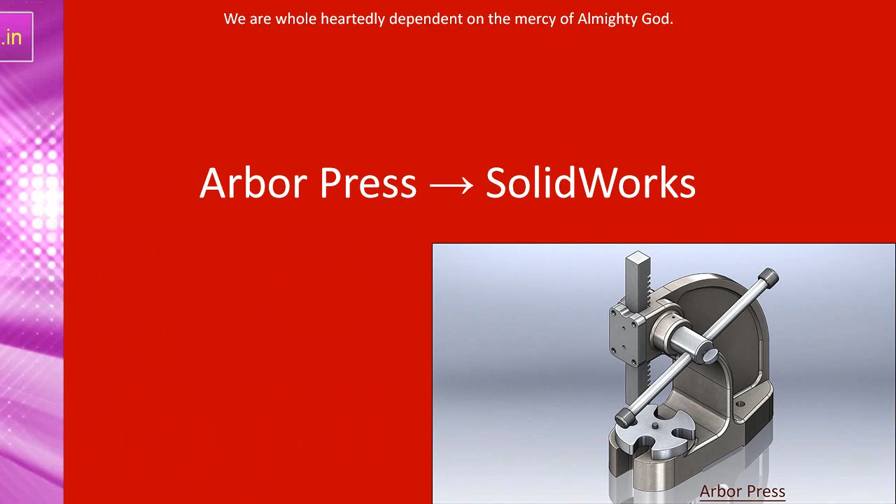Today we will create an assembly file of Arbor Press in SolidWorks. In this video, you will learn the full modeling process of this model and its components. We have used 10 part files and one assembly to make this assembly.

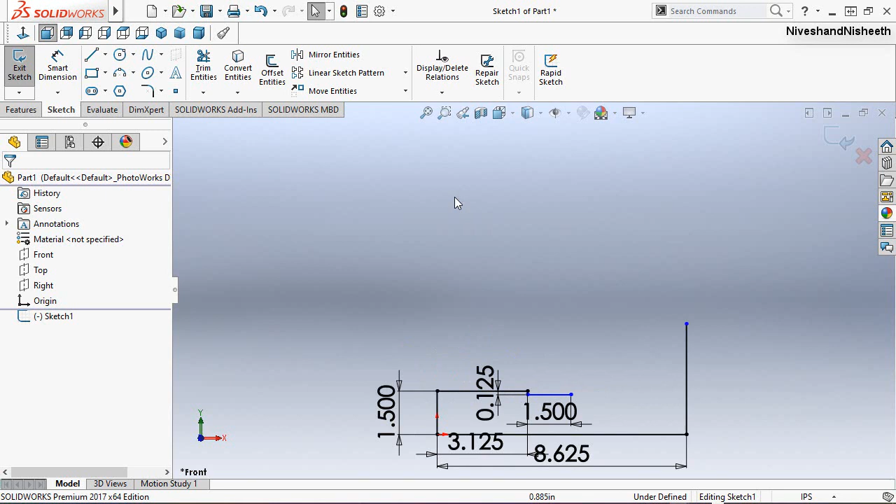Now draw a vertical line from this point. Create another line here; its length will keep 2.5 inches. Now we will draw an arc between the end points of the line like this.

Now we draw two more lines here like this, and create another arc. Now select this arc and this line and fix the tangent relation between them. Now select this one and apply another tangent relation on it. In the same manner, we will do more tangent relation over the inside of the arc.

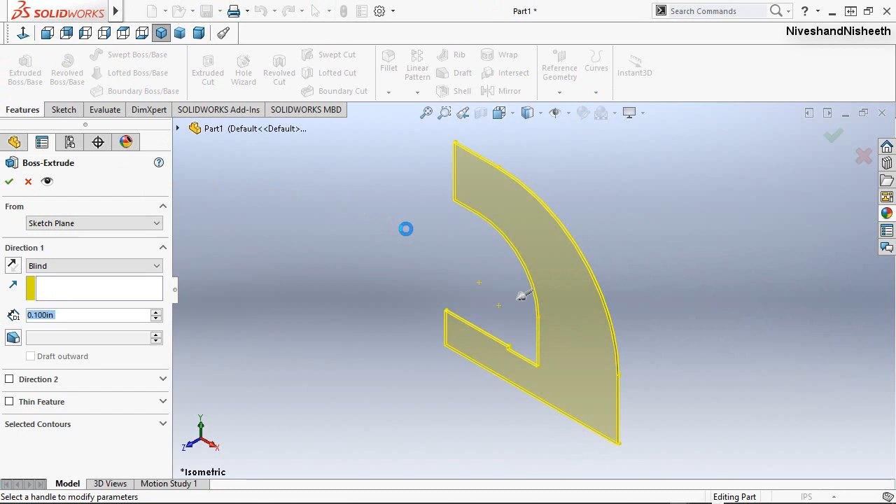Activate the extruded boss base command from here, and fix the depth value 3.5 inches, and click OK. Now see, my first extruded boss base feature has been created in the design window.

Now we will change the material of the part as polished steel. We will add one more light in this part like this. Now my model is looking perfect.

Save the part file with the name Arber Frame in the Arbor Press Assembly folder. Click Save.

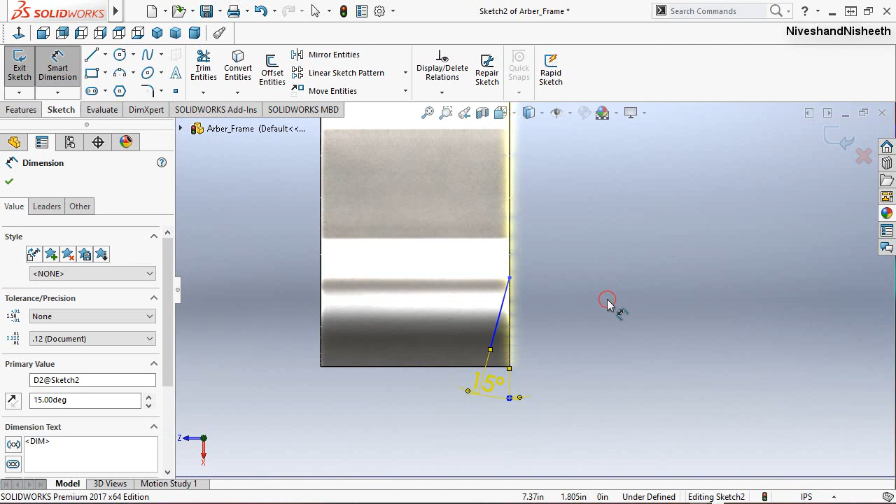Fix the angular dimension 15 degrees between this line and the outer edge. Now we draw an arc from the end point of this slanted line, and apply the tangent relation between them.

We will create a center construction line over the mid of the base extrude feature. Apply the radius of this arc, 1.25 inches.

Now select this point and the center point of the line and apply the coincident relation between them. Now we draw a vertical line between the end point of the arc and this slanted line to connect it, and apply the collinear relation between this line and the outer edge.

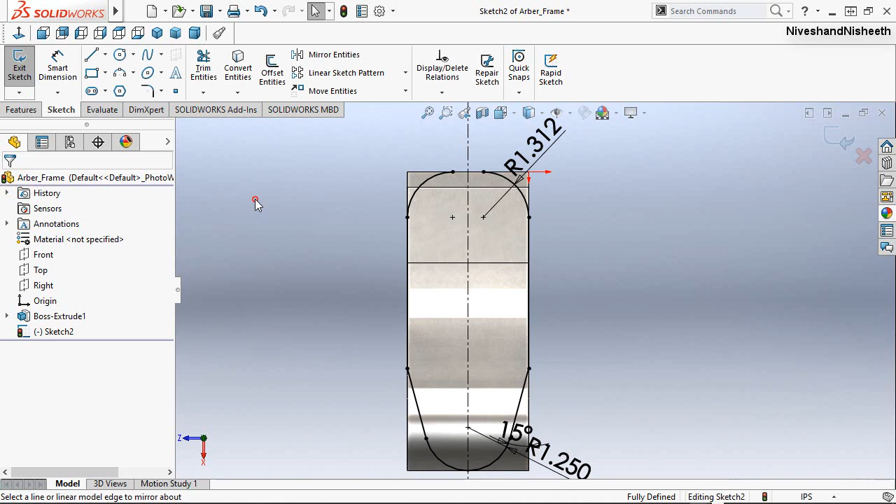Now we will activate the mirror entities command from here and select the entire sketches. We will choose the mirror about option, select the center line, and click OK to finish the command. Now draw one more line between both the endpoints of the arc to close the sketch, and finish the sketch.

Now we will activate the extruded boss base command from here. Choose the reverse direction button, and select the through all option. Now we will deactivate the merge result button so that two separate solid bodies are made here, and click OK. Now see the result.

Now we will go on the Insert tab and activate the intersect command. In the selection area, we will select the base extruded feature and then select the second extrude feature. Click on the intersect button. Now we will select each region one by one which we want to remove the portion.

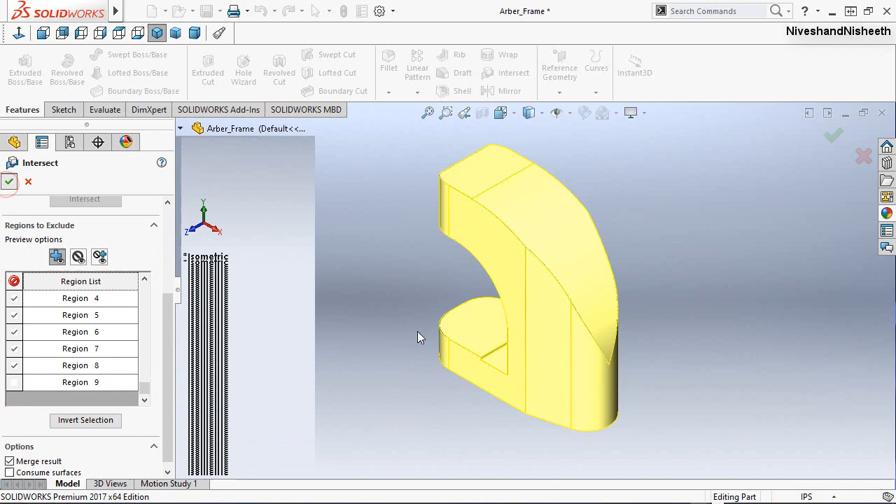Click OK to finish the command. Now see the intersect feature has been created successfully. My part is looking perfect. Alright, save the file.

Let's start a new sketch over the front face of the model. Click normal. Create a vertical line here, its length will keep 2.365 inches. Fix the dimension 2.434 inches between this edge and this line.

Now we draw two more lines on the bottom side and apply the dimension 0.375 inches between these two lines. Now create an arc on the end points of the lines to connect it, and apply the tangent relation over this arc and this line. Fix the radius of this arc, it will keep 3.375 inches.

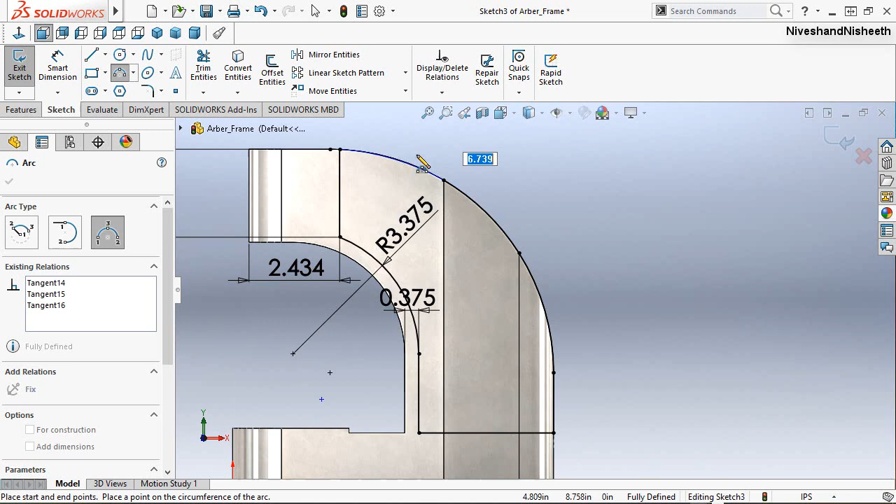Now we will take the project of the side edges of the frame by activating the convert entities command. Convert the projected sketch into construction geometry. We draw the line and arcs over the projected sketch. Alright, finish the sketch.

Rotate the model in this position and activate the extruded cut command. Fix the cut depth value 1.469 inches and click OK. Now see, my slot is cut here.

Let's start a new sketch over this slot face. Now we draw a vertical line over this edge, its length will keep 1.984 inches. Activate the offset tool from here, fix the offset distance value 0.375 inches, select the outer edge of the model. Choose the reverse direction button and click OK.

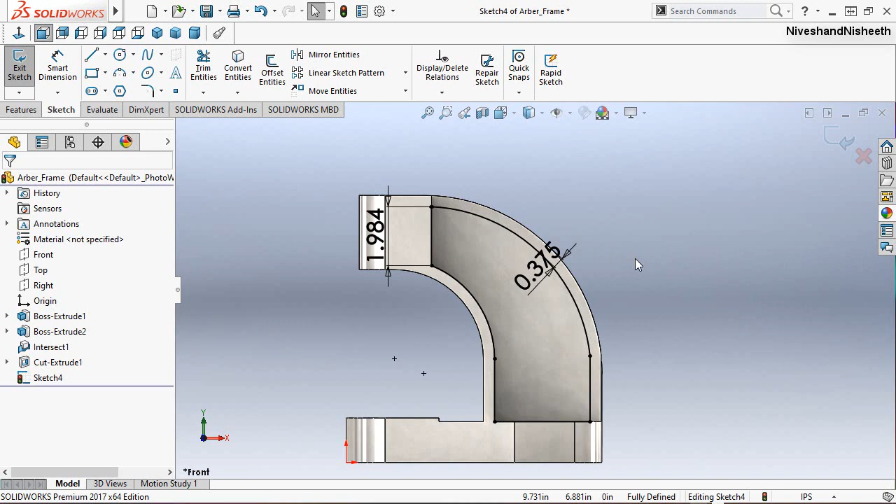Take the project of the inside edge. OK. Draw another line here to close the sketch profile. OK, finish the sketch. Now we will cut this sketch profile 0.125 inches. Alright.

Create a new sketch over this face. Draw a circle here and its diameter will keep 1.75 inches. Now select the center point of the circle and midpoint of this vertical edge, and make horizontal. Now we will draw some more lines here, something like this.

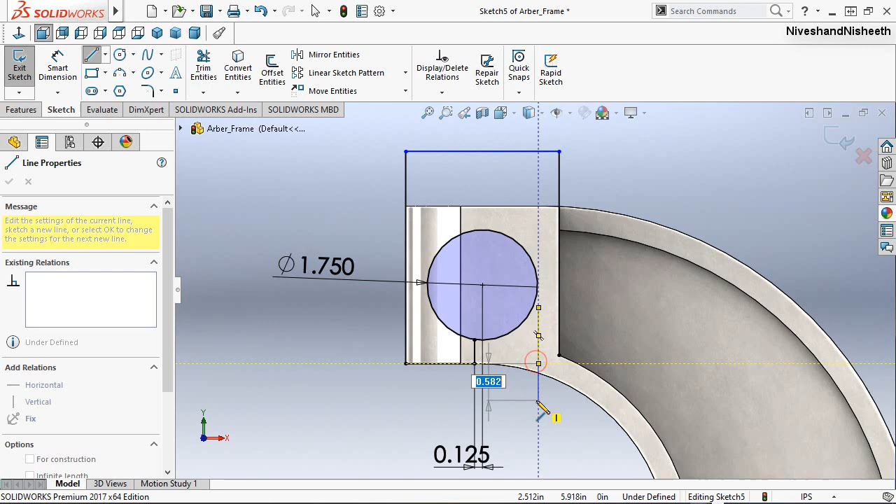Apply the dimension 0.125 inches between these two points. Now select these two points and make vertical. Draw a vertical line here and fix the dimension 0.375 inches between these two lines.

We will extend this line to this circle and trim the arc from here. Create an arc here and apply the tangent relation between these two arcs. Now select the two arcs and make equal. Okay, finish the sketch.

Set the cut depth value 0.875 inches. Click OK. Now see.

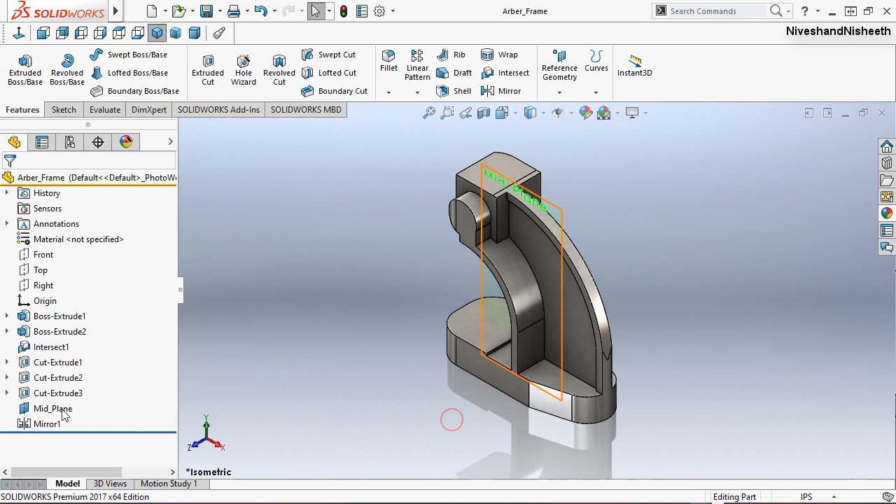Hide the visibility of this plane. Activate the extruded cut command and select this face to start a new sketch. We will draw a rectangle here. Apply the dimension 0.375 inches between these two lines.

Now we will apply another dimension on these two lines. It will keep 1.75 inches. Choose the up to next option and click OK. Now see.

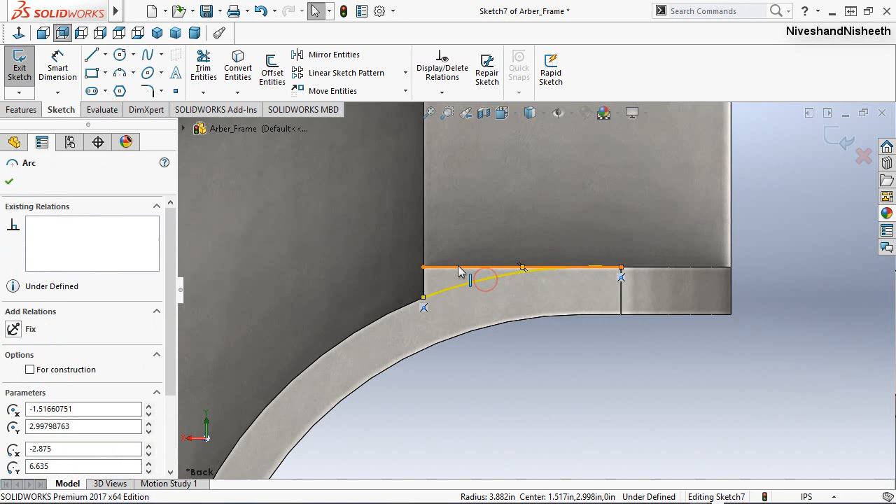Let's start the extrude cut command once again and select this face to start a new sketch. Now we will draw the two lines here like this, and create an arc to close the sketch profile. Okay, finish the sketch. Fix the depth value 0.875 inches and click OK.

Create a new sketch over the mid plane and activate the section view by selecting this plane. Now we will create two horizontal lines like this, and draw an arc to connect the sketch. Apply the dimension 0.5 inches between these two lines.

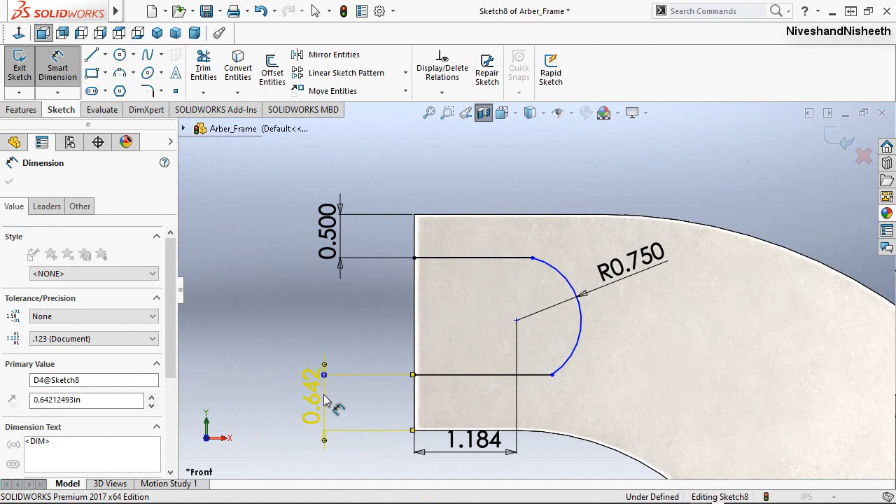Now we will select the center point of the arc and this point, its dimension will keep 1.184 inches. Fix the radius of the arc, 0.75 inches. Okay, finish the sketch.

Let's start the extruded cut command and select the sketch region. Okay. Now choose the mid plane option and fix the depth value 1 inch, and click OK. Now see, my slot is cut on here. Okay, it looks great.

Activate the extruded cut command and select this face. Draw a circle over this point, fix the diameter of this circle, it will keep 1.172 inches. Finish the sketch, set the cut depth value 1.5 inches and click OK. Now see, my hole is created here.

Let's start the sketch over this slot face and we will create another hole on this internal face like this.

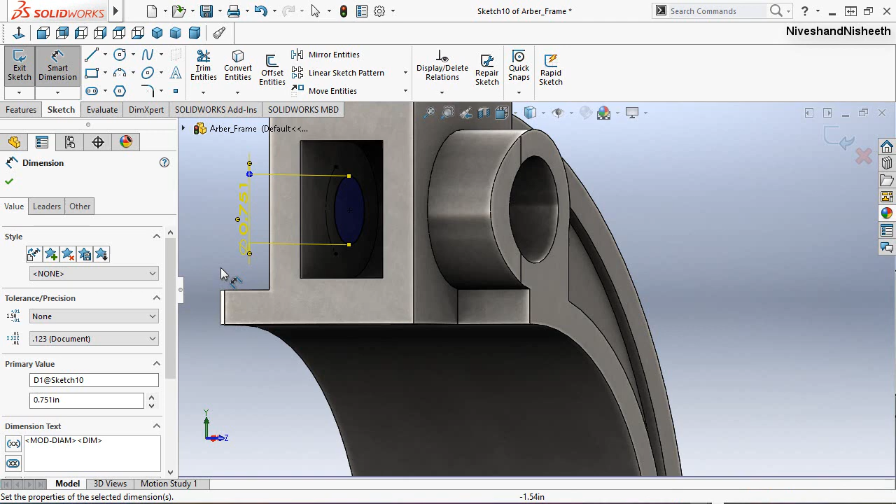Hole diameter will keep 0.751 inches. Okay, that's it.

Now activate the extruded cut command and select this face to create a new sketch.

Draw an arc on here and apply the tangent relation between this arc and the outer edge of the model. Now draw two more lines from the end point of the arc to close the sketch profile. Fix the dimension 1.25 inches on this line.

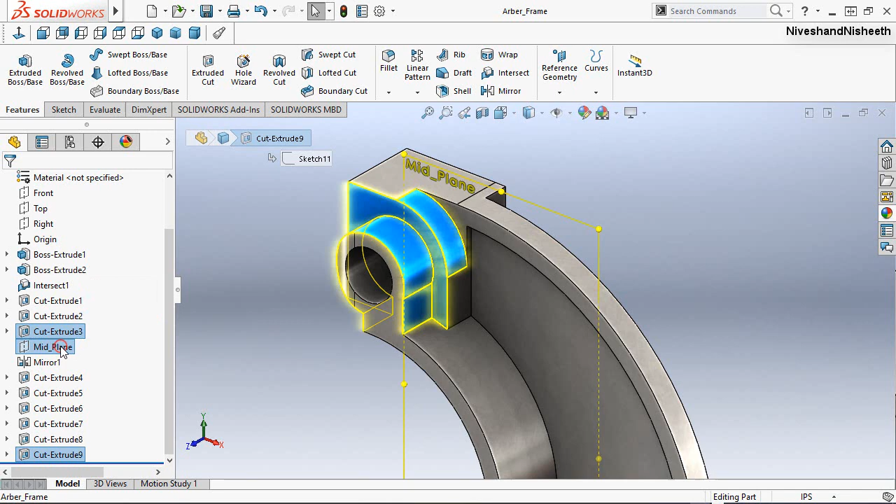Now we will create a mirror of these two extruded cut features over the opposite side of the model. Now see the result. Save the part file.

Now we will activate the fillet command from here and apply the fillet over this edge. Fillet radius will keep 0.625 inches. Okay, alright. Now my model edge is looking good.

In the same manner, we will apply some more fillets over the model edges in the following way.

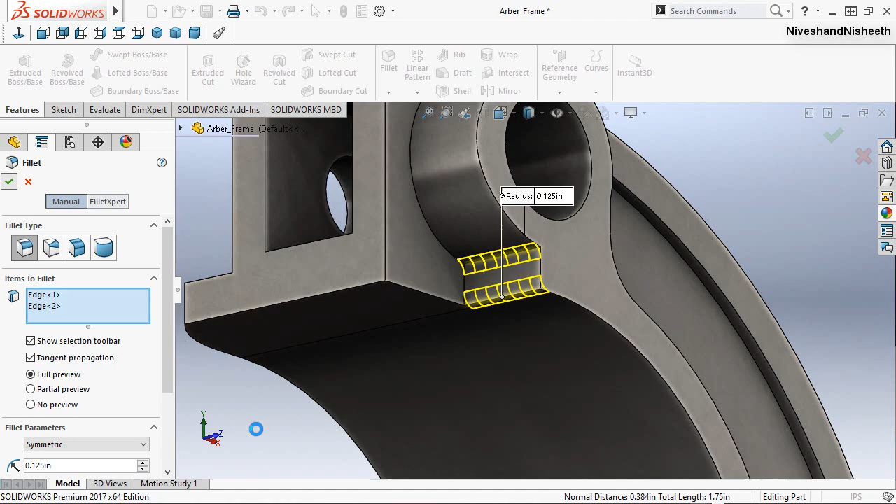Rotate the model in this position. Activate the extruded cut command and select the inside face of the model to start the new sketch.

Now we will take the project of these 5 edges of the model and convert the entire sketches into construction geometry.

Create a horizontal construction line over the midpoint of this projected edge. Now we draw a circle over the construction line and its diameter will keep 1.063 inches. Now select this edge and the center point of the circle and fix the dimension 0.75 inches.

Now we draw the lines over both sides of the circle, select the lines, and choose make equal. Fix the tangent relation between the circle and line.

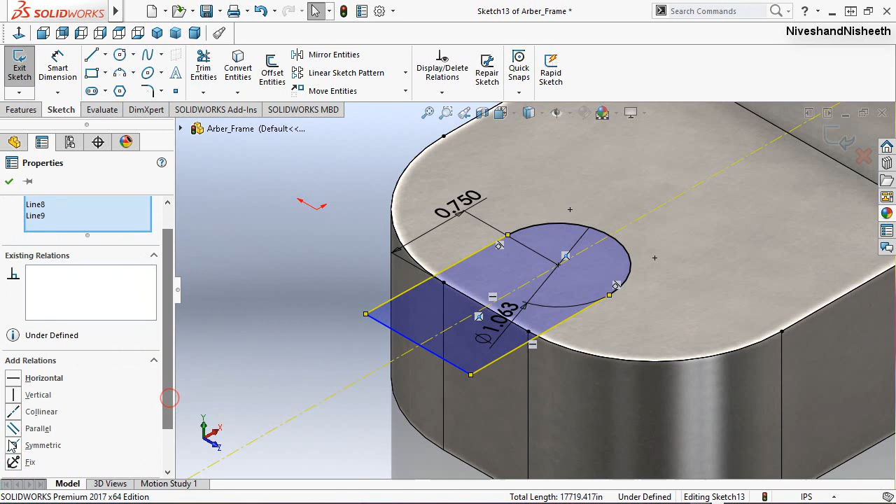Now select these 3 lines on here and apply the symmetric relation between them. Okay, alright, finish the sketch.

Now we will choose the through all option and click OK. Now see here, one more slot is cut over the arbor press frame.

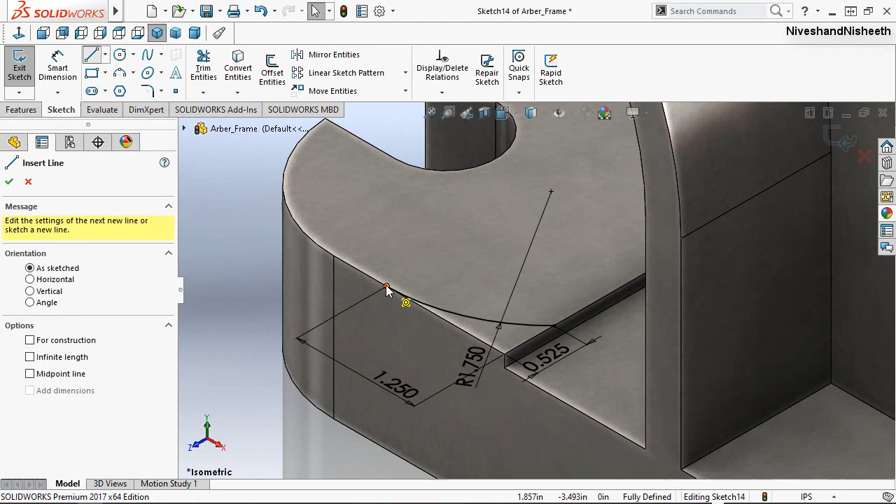Now we will create a fillet on this face in the following way by using the extruded cut command. Okay, that's it.

And create a mirror of this cut feature over the opposite side of the model. Now see the result.

Now we will give the fillets on the lower edge of the frame. Save the part file.

Activate the extruded cut command and select the bottom face of the model. Let's start the offset tool from here. Select this face, choose the reverse direction option, fix the offset distance value 0.312 inches and click OK. Finish the sketch.

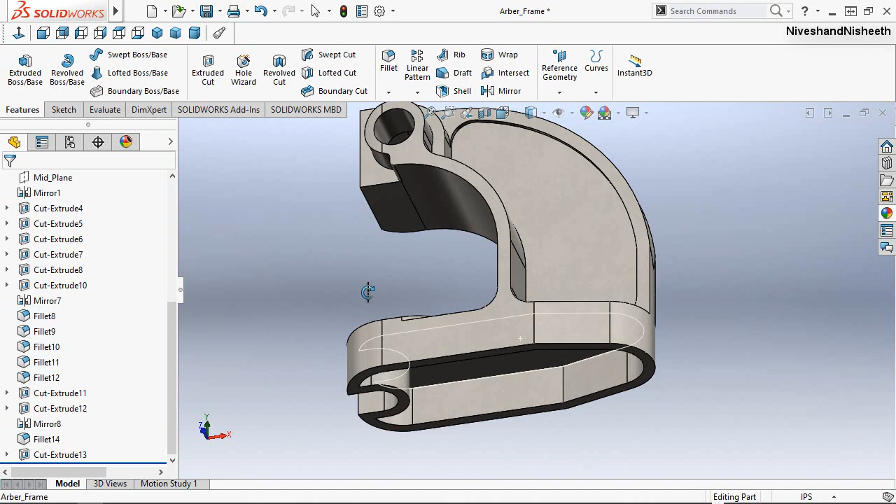Now we will create another slot over this face. Draw a rectangle on here. Set the width and height value 2.562 by 0.125 inches over this rectangle.

Now we will apply another dimension 3 inches between these two lines. Finish the sketch. Choose the through all option and click OK.

Now we will activate the extruded boss base command and select the bottom face. We create the sketch on here.

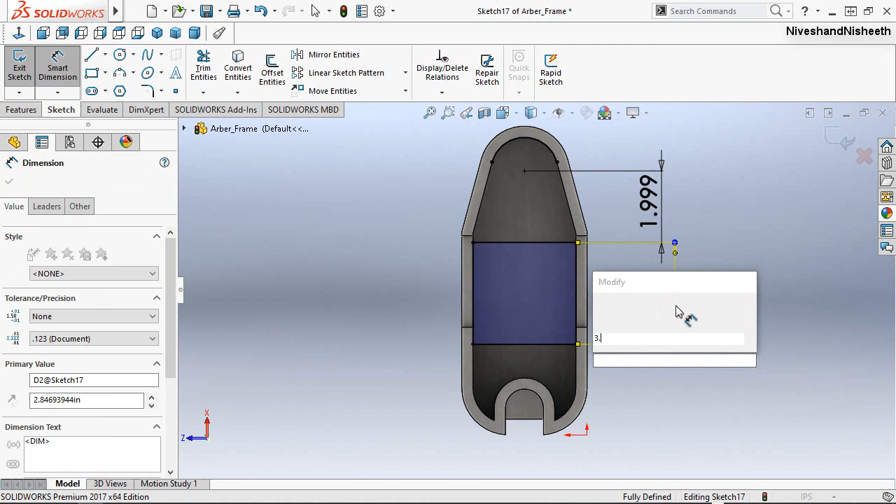Set the dimension 3.001 inches on this line. Finish the sketch. Now select the sketch region, fix the depth value 0.5 inches and click OK.

Now we will activate the extruded cut command and select the mid plane for creating the new sketch. Activate the section view by selecting this plane. Choose the front view.

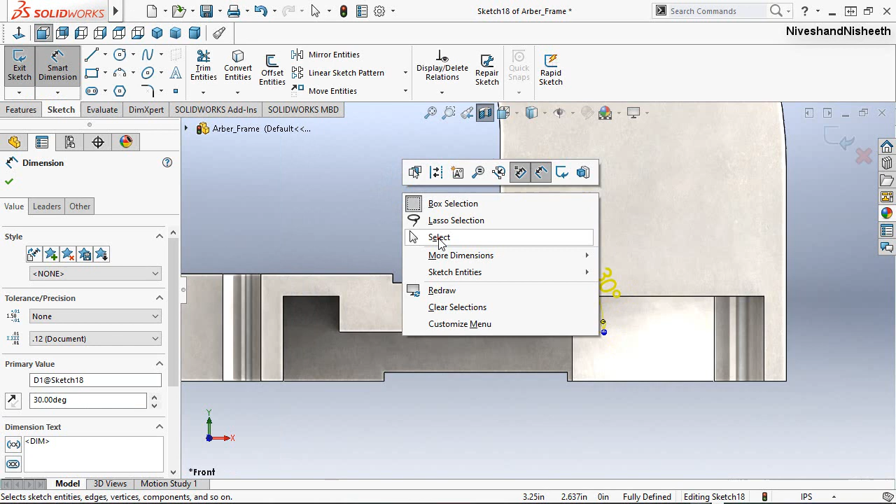Now we will draw a triangle on here. Fix the angular dimension 30 degrees between these two lines. Finish the sketch and deactivate the section view from here.

Now rotate the model in this position. Select the up to surface option under the direction 1 section. Then we will select this internal face. Now we will activate the direction 2 option.

In the same way, we will select the up to surface option on here. Now select the opposite side face of the model and click OK to finish the command. Now see, my taper surface is created on here.

Now we will apply the fillets over these 4 edges of the model like this. Fix the fillet radius 0.125 inches and click OK. It is looking very fine.

Now we will activate the hole wizard command from here. We will select the straight tap option. Bottoming tapped hole option has already been selected on here. Hole size will keep 1/4-20.

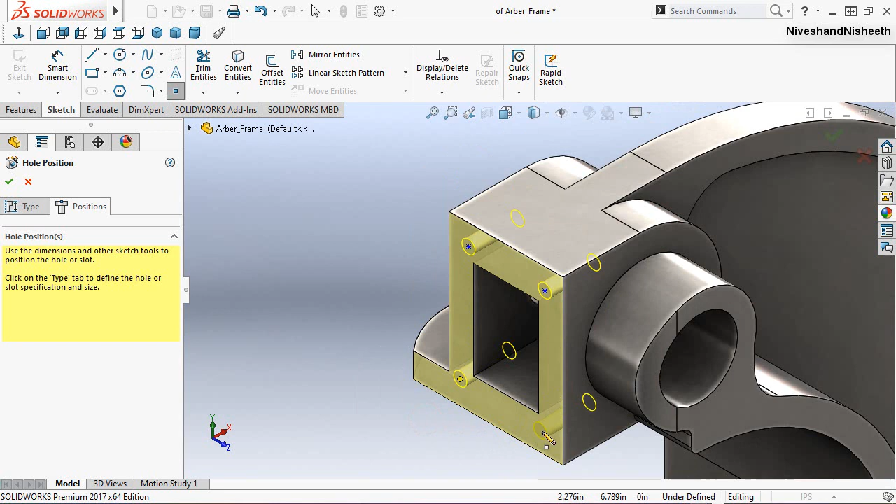Okay, that's it. Apply the dimension 1.25 inches between these 2 hole center points. Now we will apply another dimension on here. It will keep 0.25 inches.

We draw a vertical construction line on here and apply the dimension 0.625 inches between the center point of the hole and construction line.

Apply the dimension 0.25 inches between the center point of the hole and lower edge. Fix the vertical relation between the two center points of the hole. In the same manner, we will apply the vertical and horizontal relation over these holes to fully define the sketch.

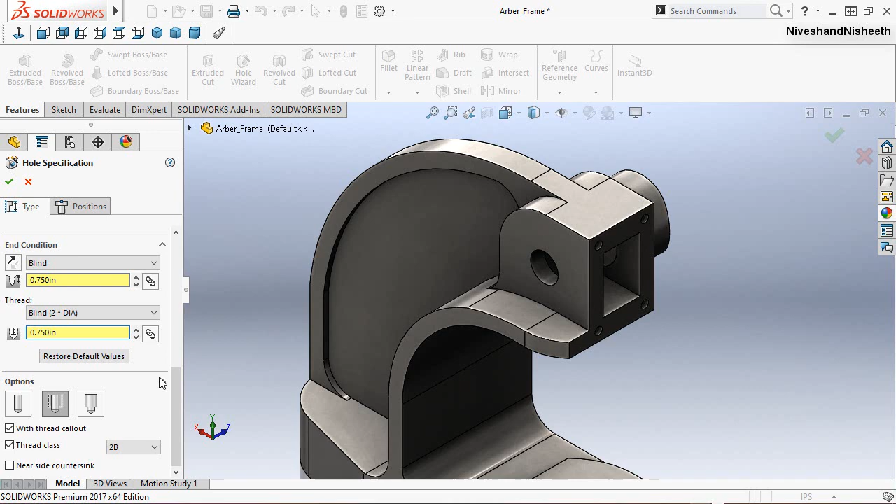In the positions tab, we will place the 2 holes over this side face of the model. Now select these 2 center points and choose make vertical. Fix the dimension 1 inch between these 2 holes.

Now we will take the project of this hole and fix the dimension 0.809 inches between these 2 points.

We will apply one more dimension on here. It will keep 0.75 inches. And click OK for creating the holes. Now see the result. Now you can see here 2 tapped hole features are visible in the feature manager design tree.

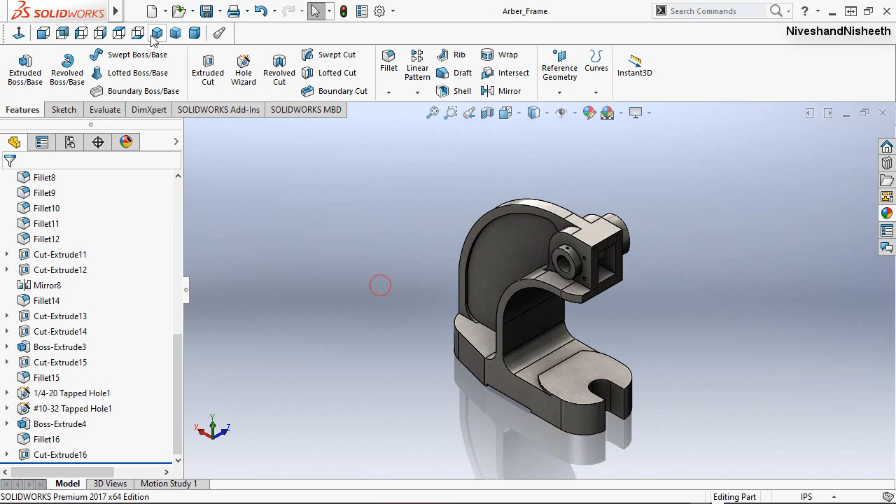Now we will create one more hole over this face. The hole diameter will keep 0.406 inches. Okay, that's it.

Now we will create a mirror of this hole over the opposite side of the model. Okay, now see the result.

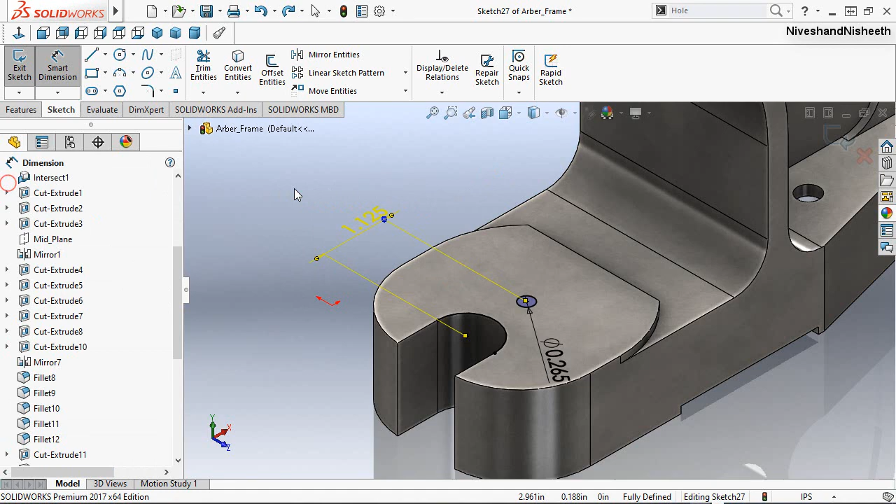And take the project of this curve, okay. Fix the horizontal relation between these two center points. And apply the dimension 1.125 inches on here. Okay, finish the sketch.

Fix the cut depth value 0.5 inches. And click OK. Alright.

Activate the cut extrude command and select the front side face. Okay.

Now we draw a vertical construction line over the mid of this edge. And create a 3-point rectangle on the top edge like this.

Select the midpoint of the rectangle line and construction line and choose Make Coincident. Select this one and this one, choose Make Collinear.

Fix the width of the rectangle 0.749 inches. Okay, finish the sketch.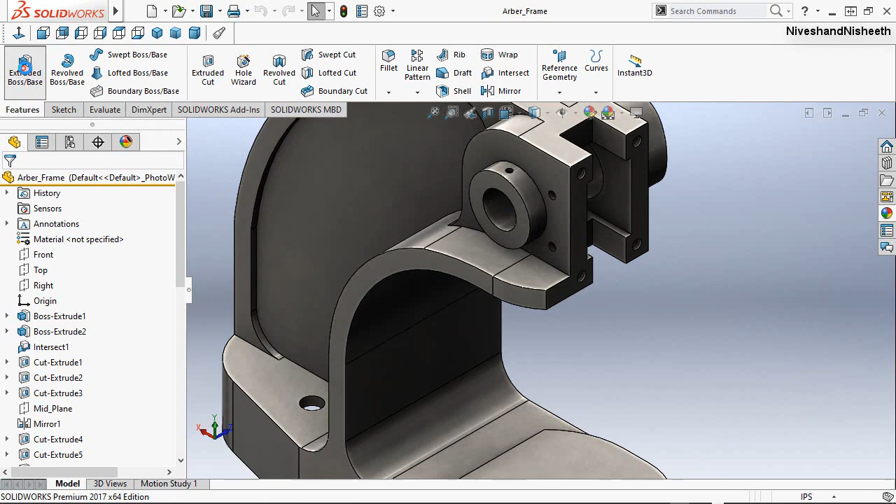Rotate the model in this position. Create a new sketch over this face. And take the project of these two vertical edges.

Now we will create the lines like this to close the sketch profile. Okay, finish the sketch.

Now we will drag the boss extrude feature handle from here like this and click OK. Now my surface is filled on here.

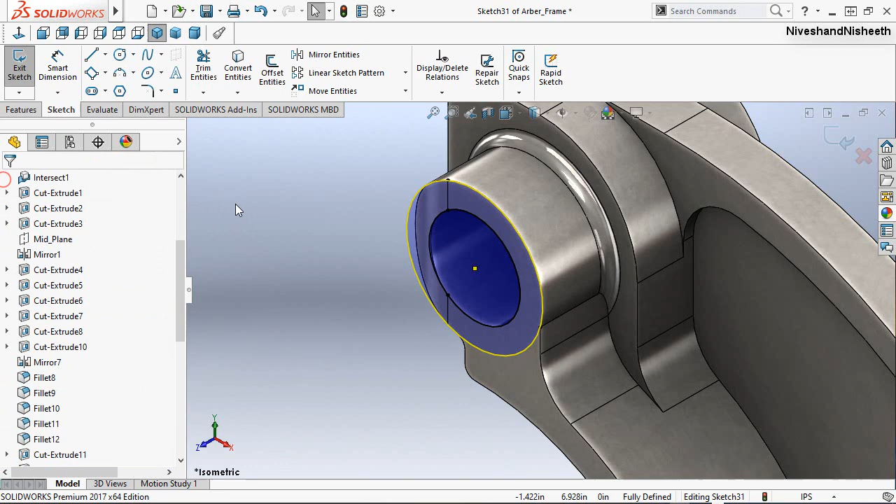In the same manner, we will fill the surface over the opposite side of the model in the following way. My frame is looking perfect.

And now we will apply some more fillets over the model like this. Now we will create one small hole over the top face of the model like this.

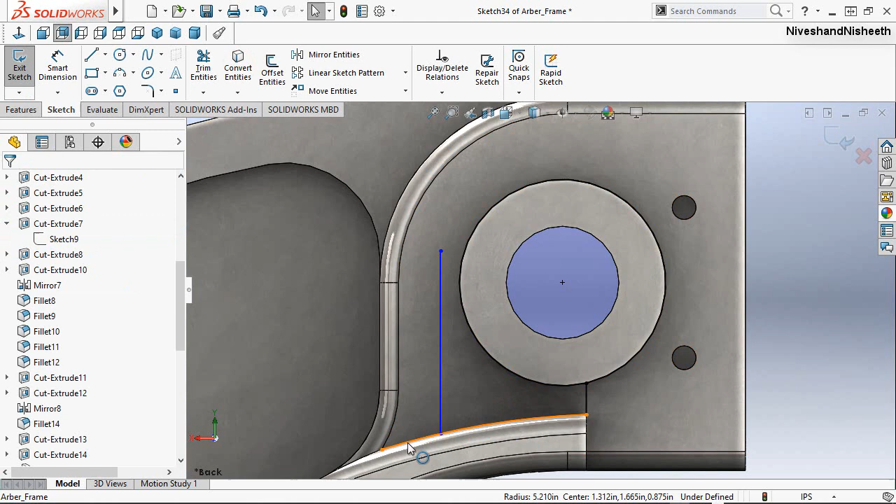Now we will take the project of this curve edge. Convert these two curves into construction geometry. Now we will fix the tangent relation between this line and the outer circle.

Draw a 3-point arc between the vertical lines to connect the sketch profile, and apply the tangent relation on these two arcs. Now create one more arc over the projected sketch.

Finish the sketch. Now we will choose the up to surface option from here. Select the outer face of this hole and click OK. Now see.

Now we will apply the fillet over these two edges like this, and apply some more fillets over the inner edges of this slot face.

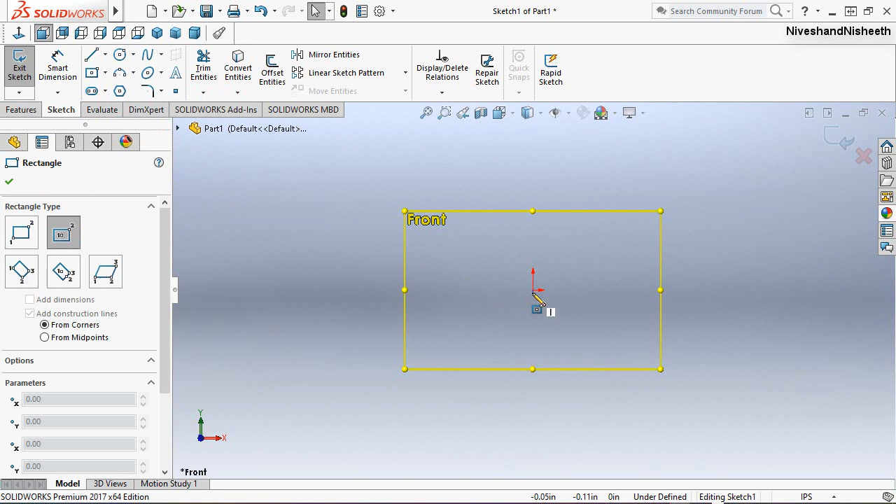Its height will keep 2.5 inches and width 1.75 inches. Finish the sketch. Activate the extruded boss base command. Enter the depth value 0.5 inches and click OK.

Let's start the extruded cut command. Select the front face of the model to start the sketch. Now create a circle on here, and its diameter will keep 0.265 inches.

Select the center point of the circle and side edge and apply the dimension 0.25 inches. Now we will apply the dimension on the opposite side, it will also keep 0.25 inches.

Finish the sketch. Enter the cut depth value 0.75 inches and click OK. Now see, my hole is created on here.

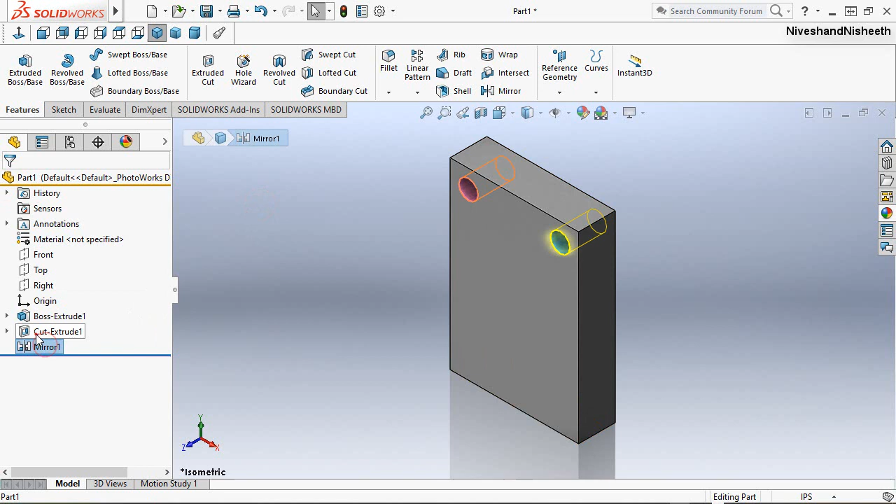Now we will create two more holes over the lower side of the model by using this tool. Okay, that's it. Save the part file with the name Face Plate.

Now we will apply the fillets over the four corner edges of the plate. The fillet radius will keep 0.25 inches.

Alright, let's start the extruded cut command and select this face. Now we will choose the front view. Draw a rectangle on here. Height will keep 1.5 inches and width 0.875 inches.

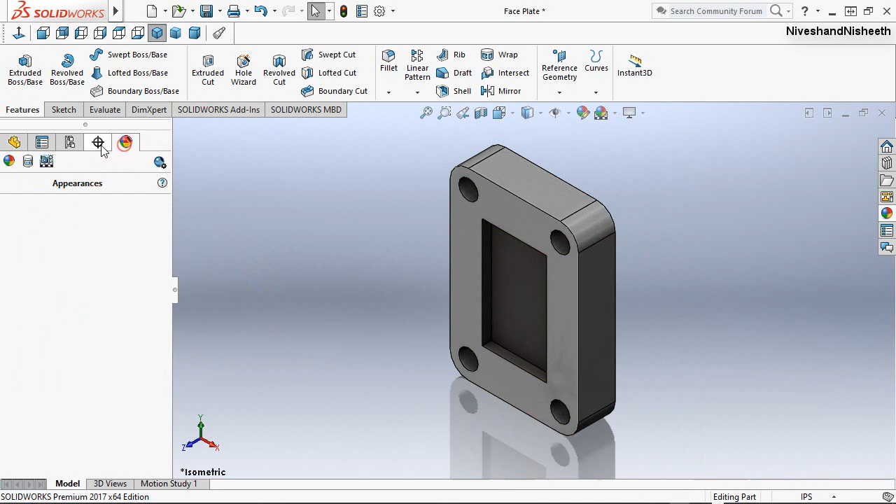We will change the material of this part as polished steel, and we will insert a new directional light of the model from here. Decrease the brightness of this directional light on here. Okay, now my part is looking perfect.

We will activate the hole wizard command from here. Now choose the straight tap option on here. We have selected #10-32 hole size under the hole specifications area, and conditions will keep through all.

And thread depth value will keep 0.5 inches. Okay, alright. Now go on the positions tab. We will select the inner slot face on here. Okay, rotate the model.

And place one hole over the face like this. Fix the vertical dimension 0.5 inches between these two hole center points, and apply the horizontal dimension on here. It will keep 0.625 inches.

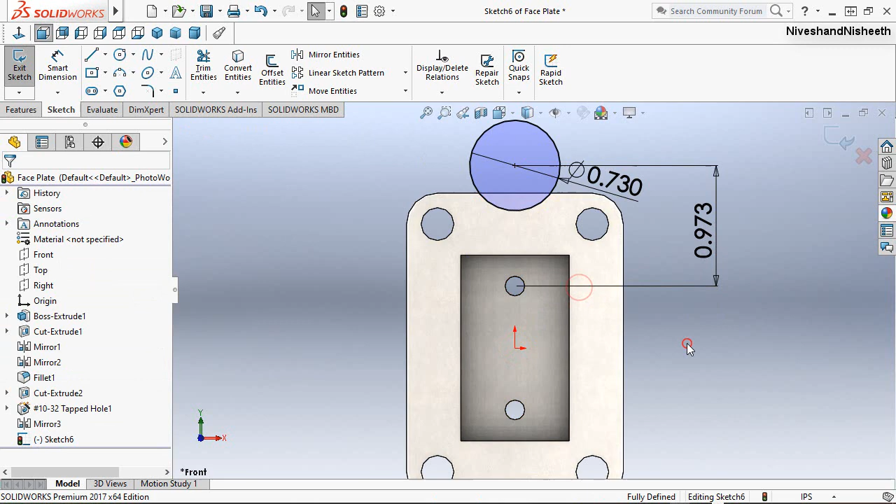Now select the center point of the top circle and part origin. OK, choose make vertical, finish the sketch. Now we will drag the cut extrude feature handle like this and click OK.

Now see here, and create a mirror of this cut extrude feature. OK. Now we will apply the fillets on the 4 internal edges like this. Okay, it looks great.

Fillet radius will keep 0.125 inches. Now the model is complete, so we will close the part file. We will create the third part file. Click OK.

Now go on the Edit Document Units dialog box and choose the IPS option. OK. Change the decimal and angular dimension values up to 3 places. And click OK.

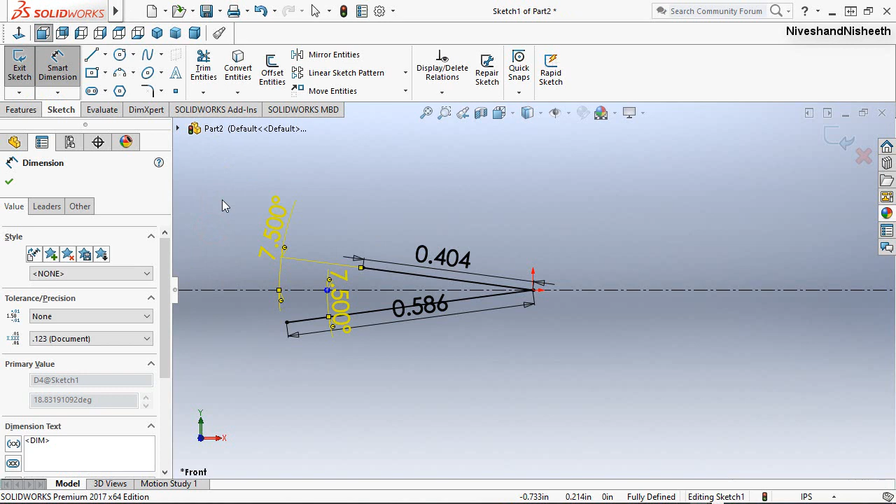Now we will draw another slanted line from the end point of the line like this. Its align dimension will keep 0.404 inches. Now we will select this line and center line, and the angular dimension will also keep 7.5 degrees. Okay, that's it.

Now we will create an arc from the end point of the line. Fix the angle value of this arc 3.862 degrees, and its radius will keep 0.404 inches.

Now create another arc from the end point of the previous arc. Select these two arcs and choose Make Tangent. Fix the angle value of this arc 86.695 degrees, and its radius will keep 0.02 inches.

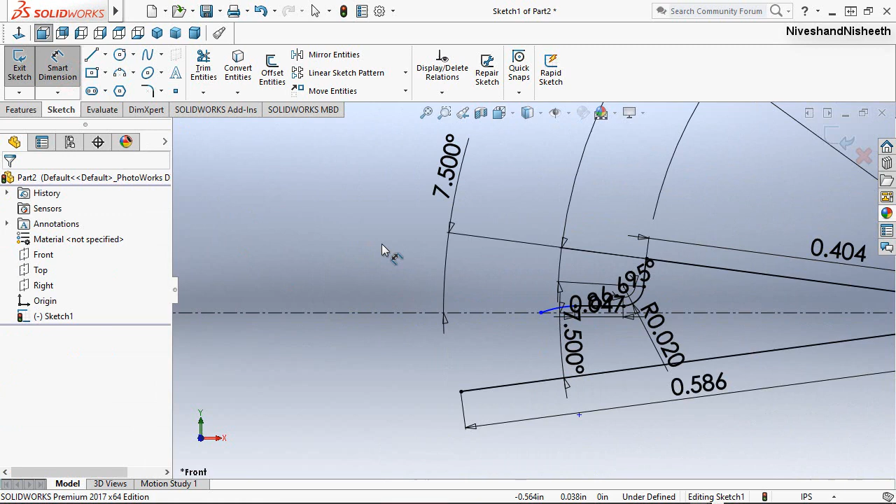Now create an arc here like this. Fix the angle value of this arc 16.396 degrees, and its radius will keep 0.109 inches. Okay, alright.

Now draw one more arc here like this. Fix the angle value of this arc 21.363 degrees, and its radius will keep 0.268 inches. Fix the dimension 0.593 inches between these two endpoints.

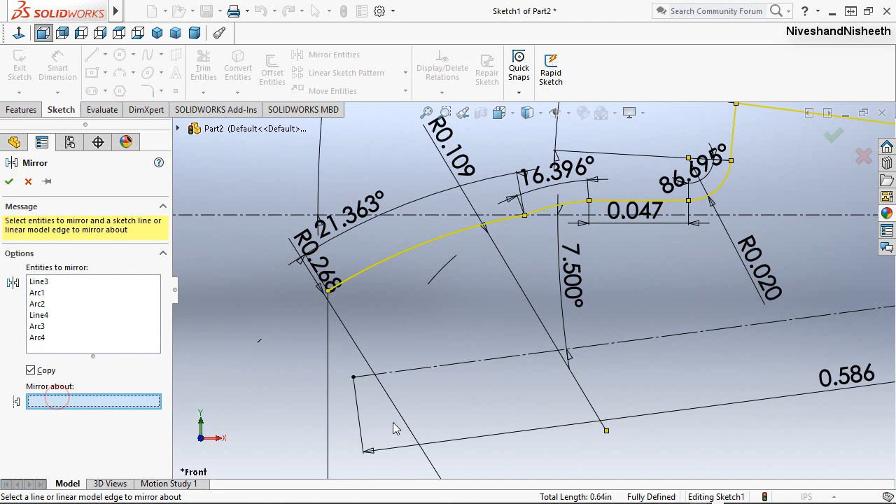Then we will choose the mirror about option, select the construction line, and click OK. Now see.

Now we will create one more arc between both the endpoints of the arc to connect the sketch, and its radius will keep 0.586 inches. Now we will change the value of this dimension, its value will keep 0.583 inches. Okay, finish the sketch.

Now rotate the model in isometric view. Activate the extruded boss base command. Choose the reverse direction button. Enter the depth value 1 inch and click OK. Now see, my first extrude boss base feature has been created in the design window. My feature is looking perfect.

And save the part with the name pinion shaft. Okay, that's it.

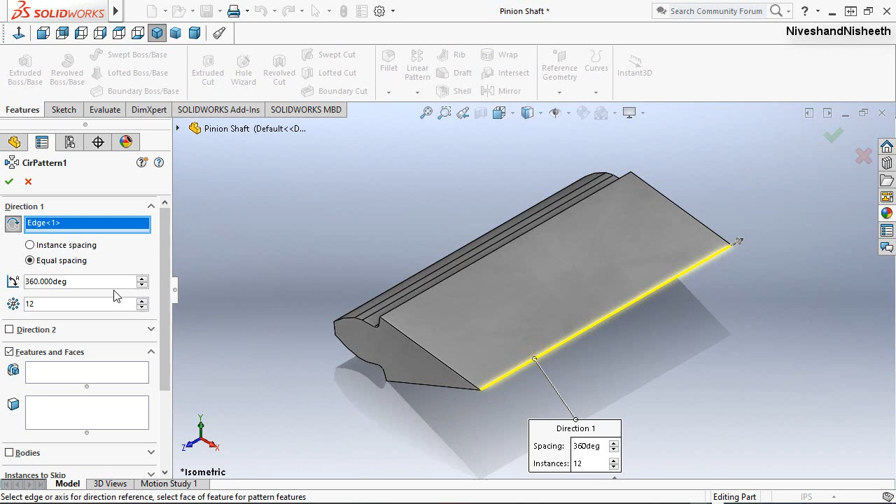Now we will activate the circular pattern tool. In the direction section, we have selected this vertical edge of the feature. Fix the angle value 360 degrees and pattern value will keep 12. In the feature to pattern section, we will select the Boss Extrude 1 feature and click OK to finish the command.

Now we will change the material of the model to chrome plate. Okay, alright. Now my model is looking perfect.

Rotate the model to the back side and activate the extruded boss base command. Start the sketch on this face. Now create a circle from the center point and its diameter will keep 1.172 inches. Finish the sketch. Fix the depth value 2.813 inches and click OK.

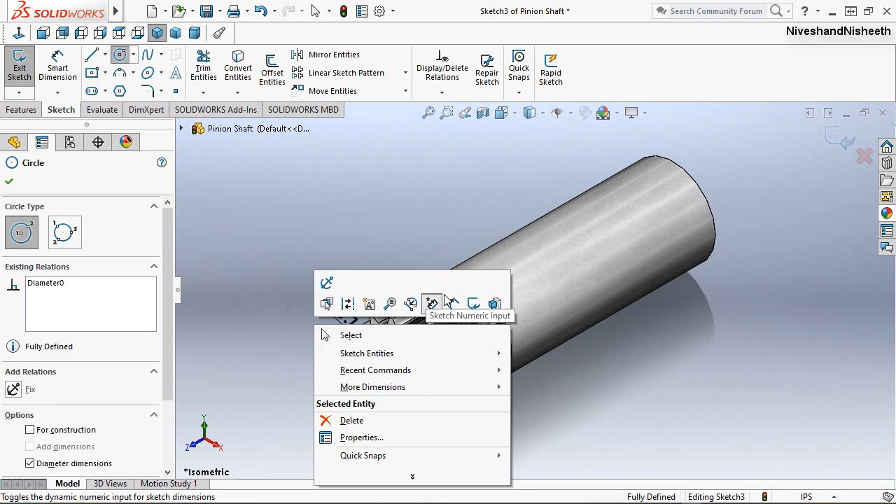Now we will activate the extruded boss base command once again and start the sketch over the front face. Create a circle from the center point and its diameter will keep 0.748 inches. Finish the sketch. Now we will extrude the sketch profile 1.187 inches and click OK. Alright.

Now see here. We will activate the chamfer command. Fix the chamfer distance value 0.0625 inches and apply the chamfer on the front and back circular edge as well as the pinion teeth also. Okay, alright. It is looking very nice.

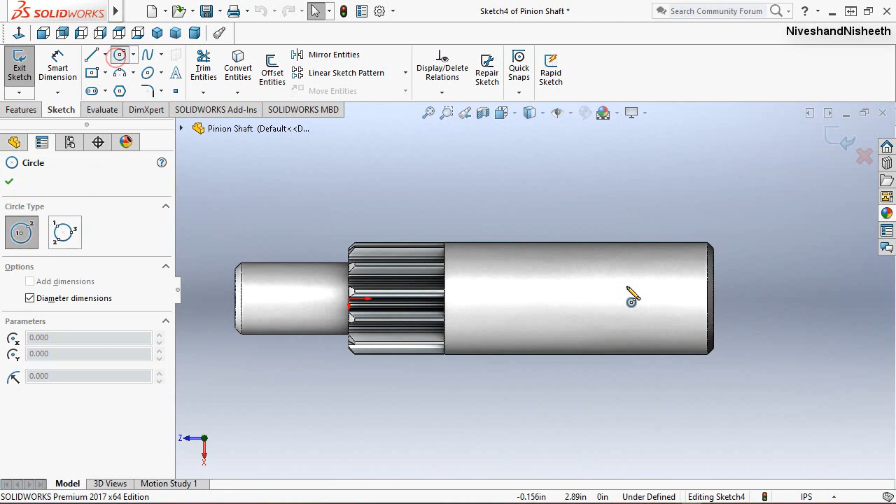Select the top plane, sketch. Now create a circle here and its diameter will keep 0.515 inches. Select the center point of the circle and part origin. Choose to make vertical.

And apply one more dimension like this, it will keep 0.5 inches. Finish the sketch. Now we create a hole by selecting this circle. Okay, now my pinion shaft is looking perfect.

Let's start the new sketch over this face. Activate the Convert Entities command, and take the project of these curves like this.

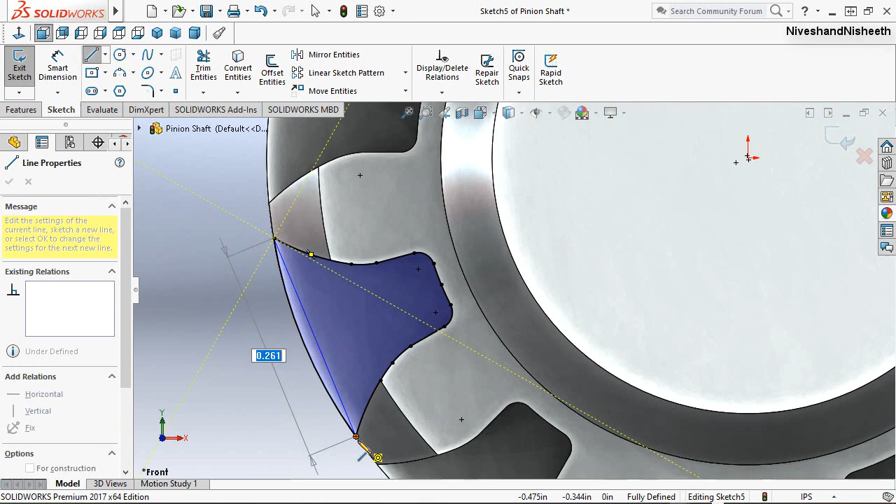Create one more aligned line over the outside like this, and apply the parallel relation between these two slanted lines. Select this line and center point of the part and apply the dimension 1.575 inches.

Activate the offset tool from here, and fix the offset distance value 0.0625 inches. Now deactivate the add dimension and select chain option from here, and now we will take the offset of this arc.

We will extend these three curves on here like this. Trim the curves on here like this. And give the dimension to fully define the sketch.

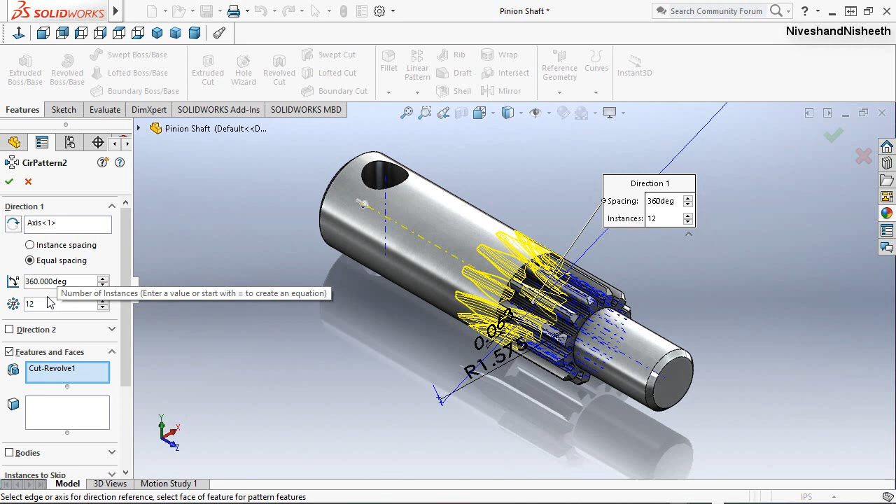Now we will open the visibility of temporary axis of the model from here and select the cut revolve feature and the center axis of the model. Now we will activate the circular pattern tool from here. My number of pattern value already has been set on here, and click OK to finish the command.

Now my model is looking perfect. Save the part file. Rotate the model in the rear side.

Okay, now we will activate the hole wizard command. We create a straight tap hole on here. Hole size will keep 1/4-20.

Hole depth value will keep 0.315 inches. Thread depth value will also keep 0.315 inches. Now we have selected cosmetic thread option on here. In the positions tab, we will select this face for placing the hole and select the center point of the outer circular edge. And click OK to finish the command.

Okay, now see my part is complete on here, so we will close the part file. Now we will create another new part file on here.

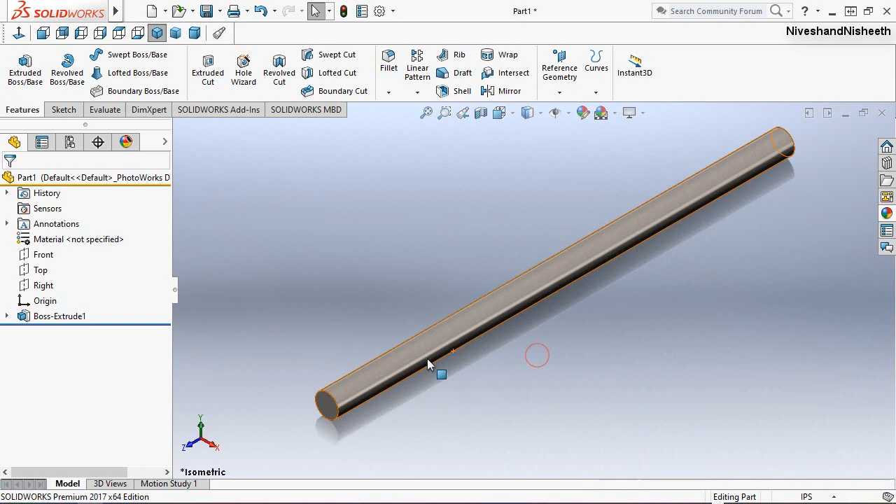Now we will change the material of the model as brushed steel. And save the part file with the name lever arm. Click save and close the part file.

Now we will create another new part file from here. Activate the extruded boss base command. Select the front plane to start the sketch. Now create a circle on here, its diameter will keep 3.5 inches. Okay, finish the sketch. Extrude this circle 0.5 inches.

Now we will change the material of the model as polished steel. And save the part file with the name table plate.

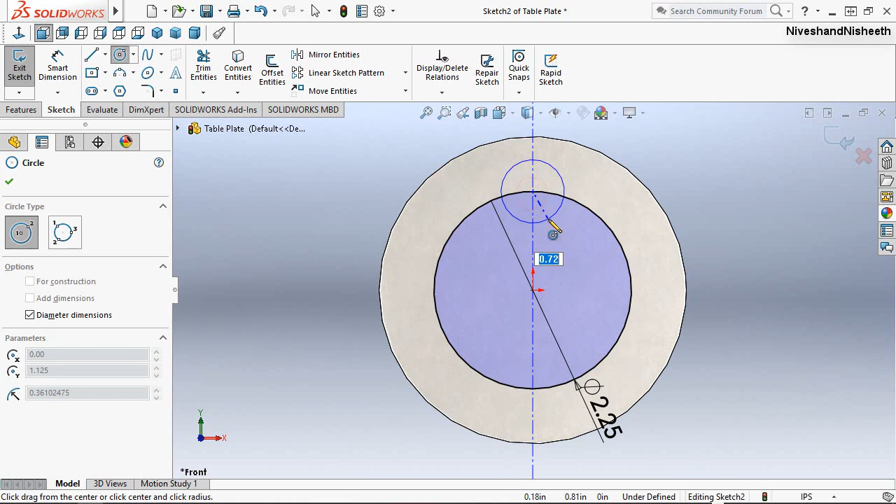Let's start the new sketch over the top face. Now we will create a circle 2.25 inch diameter from the part origin. Create a vertical construction line over the part origin. Create one more circle over the center line, its diameter will keep 0.72 inches.

Now we draw two vertical lines over the both sides of this circle, and fix the tangent relation between this line and circle like this. Erase the unwanted sketches by using the trim command.

Convert these two circles into construction geometry. Now we will draw an arc on here to connect the sketch. Okay, finish the sketch.

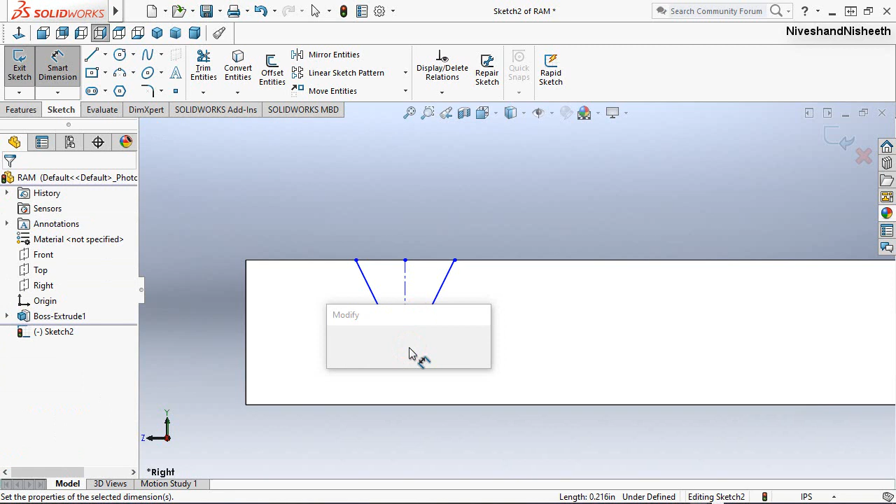Now select the 3 lines and fix the symmetric relation between them. Bottom line dimension will keep 0.061 inches.

Top line dimension will keep 0.192 inches. Now we will create one more dimension on here; it will keep 0.937 inches. And apply the angular dimension 40 degrees between these two slanted lines.

Now draw a line on here to close the sketch. Finish the sketch. Select the through all option and click OK. Now see my slot is cut on here.

Activate the linear pattern tool from here. In the direction 1 section, we will select the side edge of the model. Fix the spacing value 0.26 inches and set the number of instances value 23. Click OK to finish the command.

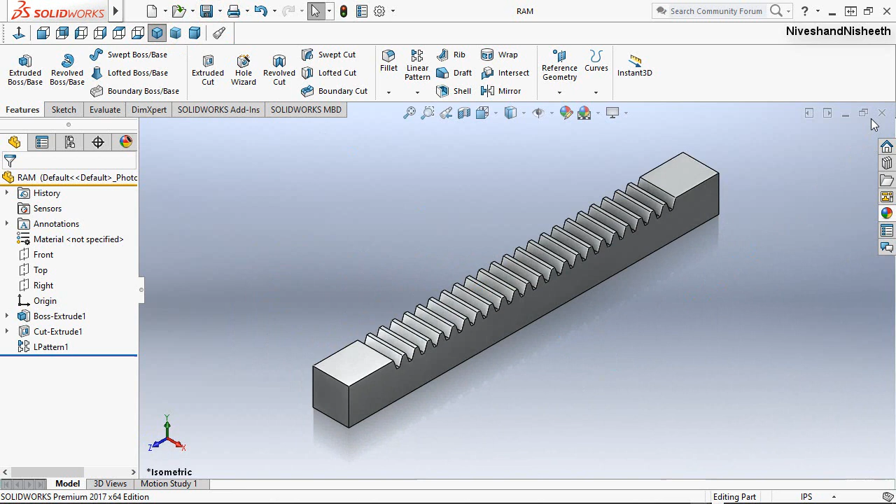Create another new part file on here. Choose IPS option. Let's start the new sketch over the front plane. Now we will create two circles on here like this.

Outer circle diameter will keep 0.75 inches and the inner circle diameter will keep 0.5 inches. Finish the sketch.

Extrude this sketch region 0.625 inches. That's it.

Now we will apply the chamfer over this edge. Chamfer distance value will keep 0.031 inches and click OK.

Now we will apply the fillet on the back edge. The fillet radius will keep 0.125 inches. Okay, now see.

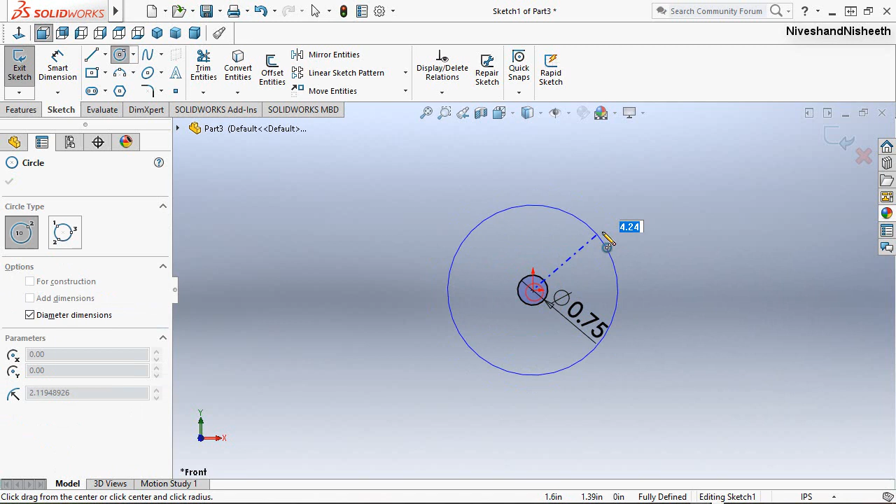Outer circle diameter will keep 1.125 inches and the inner circle diameter will keep 0.75 inches. Finish the sketch.

Extrude this sketch 0.375 inches. That's it.

Change the material of the part as polished steel. Save the part file with the name collar. Apply the chamfer over this edge.

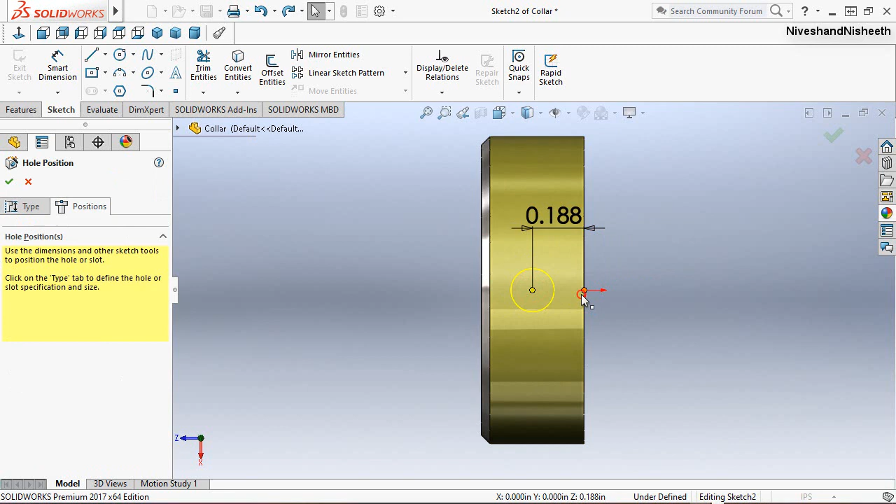Now we will create a hole over the circular face of the model like this. Now my file is completed on here, so we will close the part file.

Now we will create one more part file with the name GIB plate like this. Draw a rectangle with the given dimensions on here. Finish the sketch.

Enter the depth value 0.093 inches and click OK. Save the file and close it.

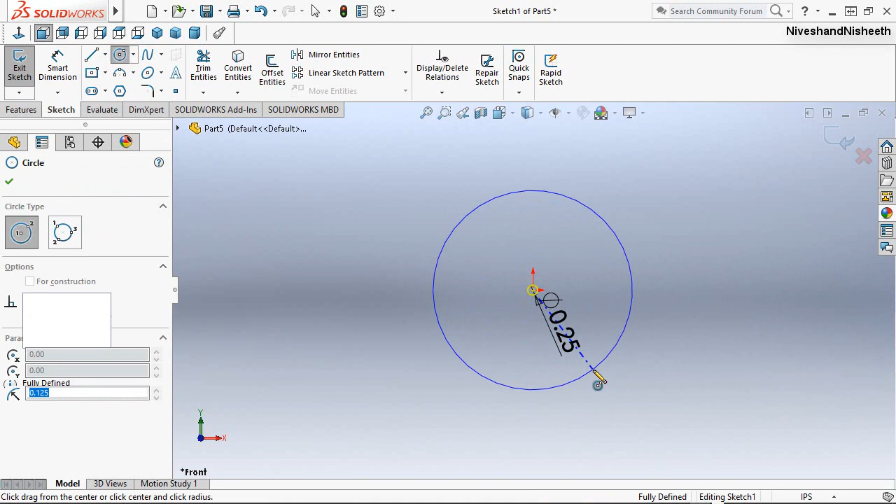Extrude this circle 0.875 inches. Click OK.

Change the material of the part as polished aluminum. It looks great. Apply the chamfer over the front and back circular edge of the model.

Save the file, name it as Groove Pin. Close the file. Finally, all the part files of Arbor Press model are finished here. So now we will create a new assembly file in SolidWorks.

Click OK. Now you can see that the begin assembly command is already been activated on here. Click the browse button and insert the Arbor Press frame in this assembly.

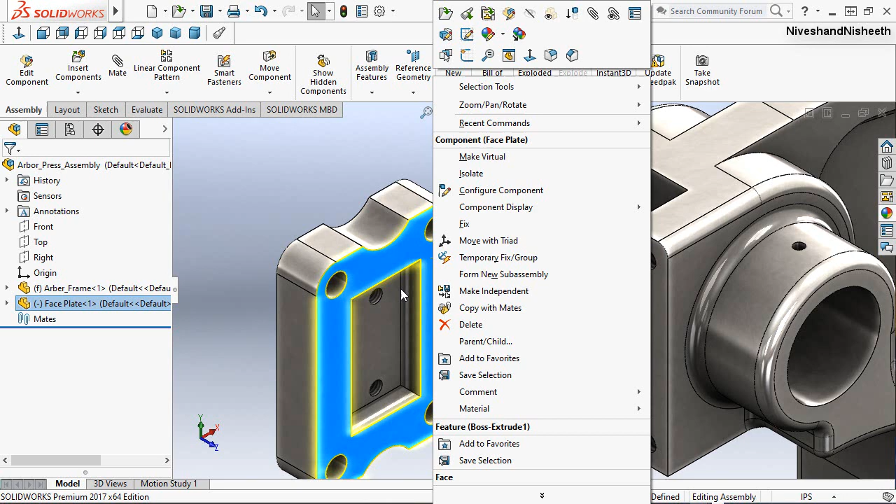Now we will rotate the faceplate in this position by activating the move with triad command. And fix the concentric mate between the hole of frame and faceplate.

Now we will select this face, okay, and back face of the faceplate and apply the coincident mate between them. Now rotate the assembly in the opposite side.

And fix the one more concentric mate between these two holes. Now see, my component is fully defined on here.

Now we will place the pinion shaft file in this assembly. Rotate the component 90 degrees in 2 times about the y-axis.

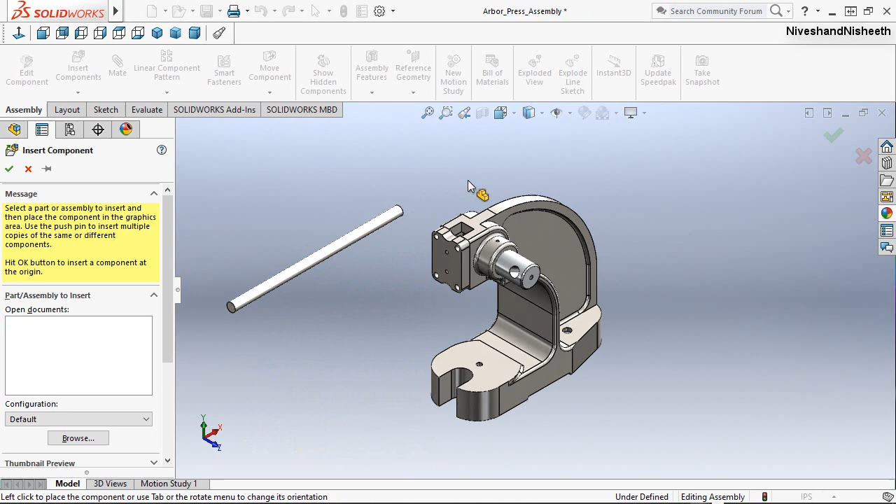Now we will place the lever arm file on here. And apply the concentric mate between lever arm and hole of the pinion. Okay, that's it.

Edit the concentric mate on here and we will activate the lock rotation option. Okay.

Now we will fix the coincident mate between the front plane of lever arm and the top plane of pinion shaft. Okay, that's it. Now see.

Now we will place the thumb screw on here. And fix the screw on the hole of the pinion by using the mate command.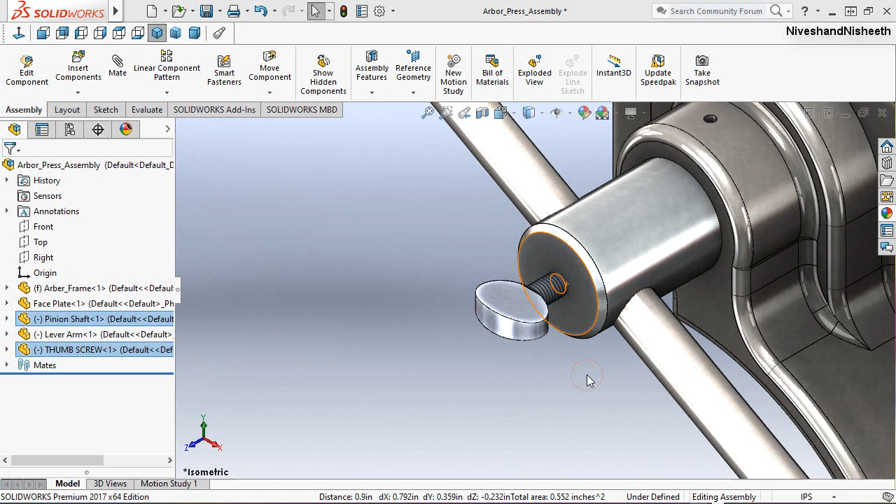Apply the distance mate between the front face of the pinion shaft and the back face of the screw. Okay, and fix the distance value 0.125 inches.

Now we will apply the coincident mate between the top planes of the thumb screw and lever arm. Okay, alright, now see the result.

Now we will place the part table plate on here. Select these two holes of the part like this and apply the concentric mate between them.

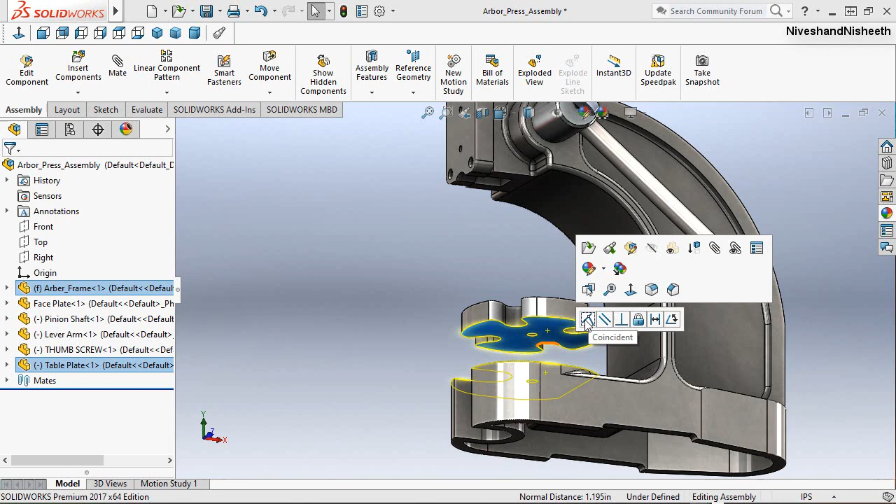Now we will apply the angle mate between the right plane of the table plate and the front face of the frame. Okay, and set the angle value on here 24 degrees. Okay, that's it. Now see.

Now we will place the part handle cap in this assembly. Select the keep visible button on here to place the second copy of this part. Okay.

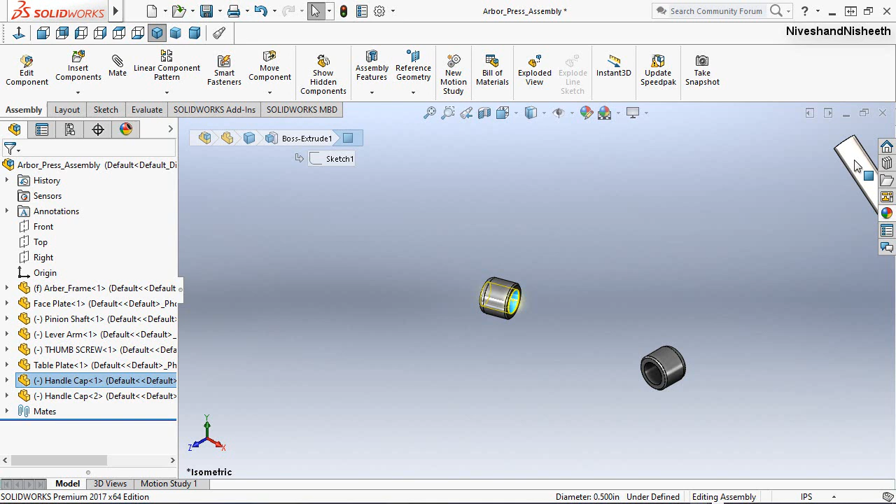Now rotate the cap in this position. And fix the concentric mate between the hole of cap and lever arm.

In the same manner, we will fix the second cap over the opposite side of the lever arm. Fix the coincident mate between the circular edges of these two components.

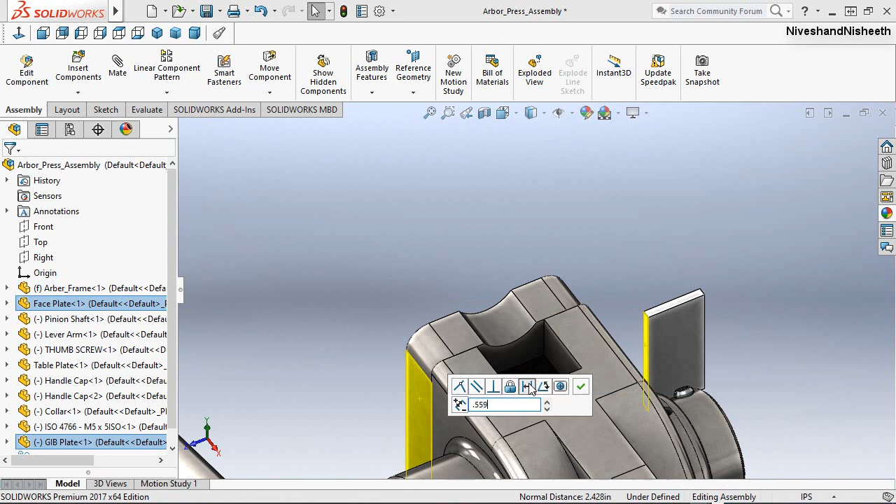Now we will apply another distance mate between the side face of the parts. Okay, its dimension will keep 0.559 inches.

Insert the groove pin on here. And fix the pin on the hole of the table plate. Apply the distance mate between these two faces of the model.

Now we will place the RAM model on here. Okay. Rotate the model in a vertical position like this.

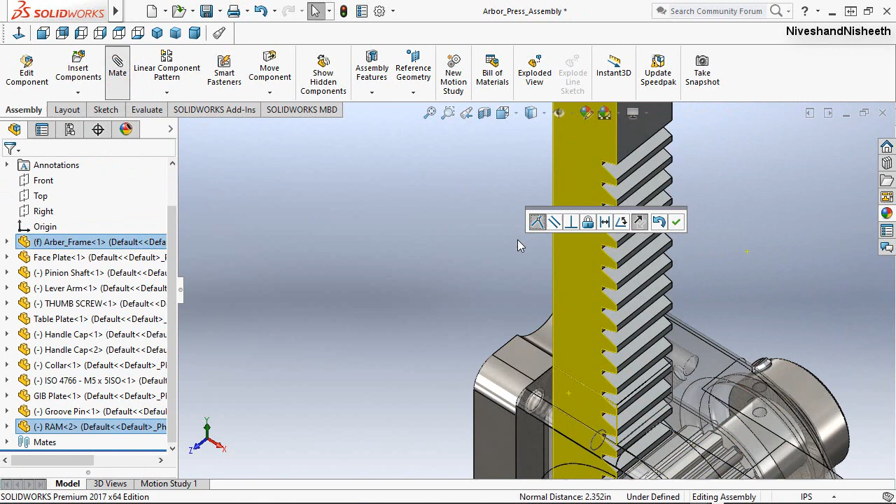And apply the coincident mate between the side face of the RAM model and this slot face of the frame. Okay, that's it.

Now we will drag the handle and RAM part like this. Now see here, there is no relationship established between these two components. Both the components are rotating separately on here.

Next, we will link these components to each other by using the rack pinion mate. Okay, that's it.

Select these components and choose Isolate option from the design window. Rotate the model in opposite side.

Let's activate the mate command from here. Okay.

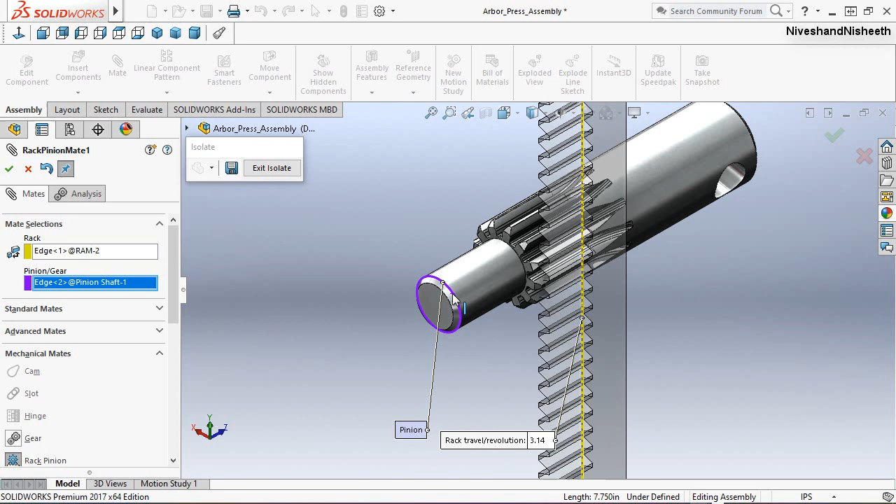And then next we will select the circular edge of the pinion shaft and click OK to apply the rack pinion mate.

Now choose the Exit Isolate button on here. Okay, now see here my rack pinion mate is showing on here in the feature manager design tree.

Now we will drag the lever arm to check the result. Now my lever arm and RAM bar files are simultaneously rotating on here by using this mate. It looks great. Save the assembly.

Finally, my Arbor press assembly has been completed here in SolidWorks. I hope you will enjoy this video.